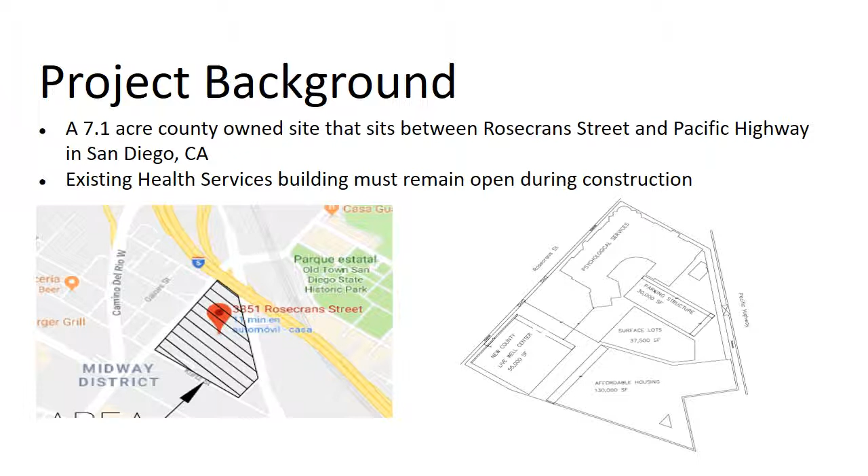In addition to the county's request, a recycling system will be incorporated on site to collect, treat, and reuse both graywater and stormwater runoff to supply the building's irrigation system, green roof toilets, and urinals, as well as achieving LEED Gold status. The project also includes other water, wastewater, and stormwater components, along with geotechnical and construction engineering analysis.

In the existing conditions, the majority of the site's surface is impervious and stormwater flows into the city's stormwater conveyance system without treatment. This degrades the water quality in our oceans, rivers, and bays. So for the proposed site, we plan to capture and treat stormwater prior to its discharge to the city's stormwater conveyance system.

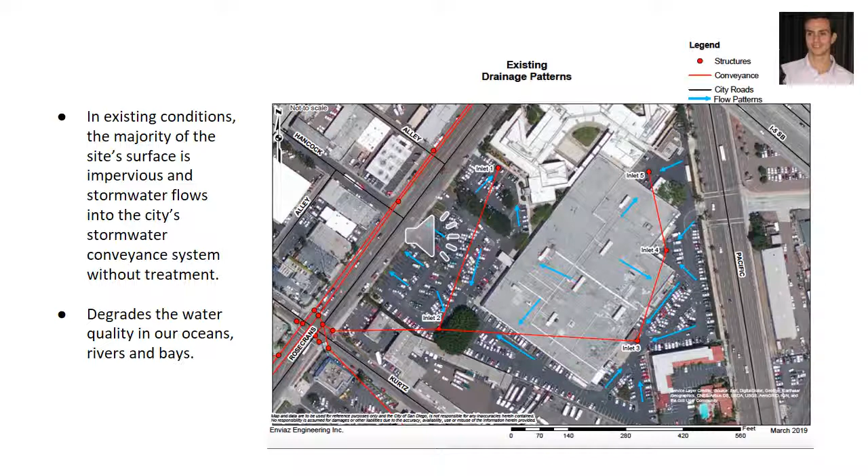The left image is an aerial view of the site on the western side of the existing facility. As the arrows show, stormwater flows directly to Rosecrans Street without prior treatment. The right image shows the weep holes in which stormwater flows. As you will see later in the presentation, our sustainable design includes swales to treat water prior to its discharge.

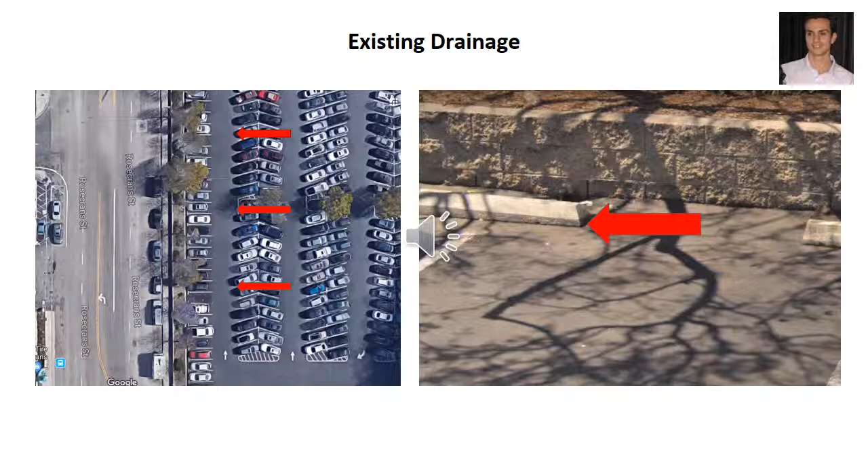Our sustainable site design includes a cistern collection system. After conducting a feasibility study per the City of San Diego stormwater standards, a 3,000-gallon cistern was determined most feasible for irrigation and toilet flushing. A potential savings of up to 42,000 gallons per year is possible during a typical wet year.

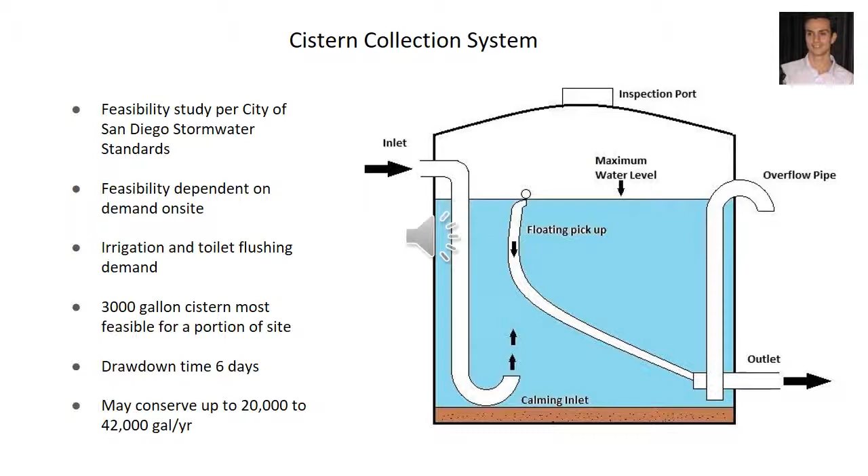Per the County of San Diego's hydrology manual, the rational method was used to determine peak flow values. As you can see on the proposed drainage plan, the site was divided into different basins. This was necessary to determine BMP sizes and to ensure a majority of the water was being captured or treated prior to discharge to the city's conveyance system by diverting stormwater to appropriately sized swales.

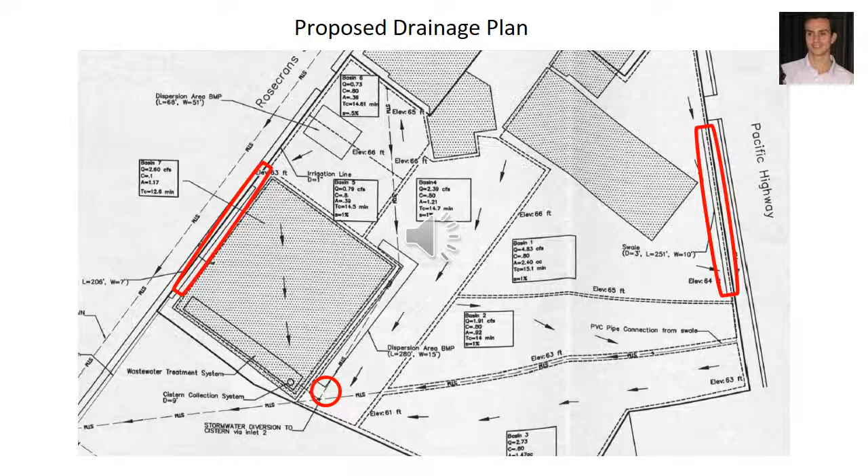The swales are shown on the east and west side of the facility, and the diversion system to the cistern is shown on the red circle.

BMPs use governing principles of low-impact developments, also called LIDs, to conserve natural resources while minimizing and disconnecting impervious area. Site LIDs serve several uses, including retaining a portion of stormwater, providing enhanced infiltration, and increasing hydraulic residence time of water before being discharged into city conveyance systems. They also reduce soil erosion, carbon dioxide emissions, and the heat island effect, all while being visually appealing.

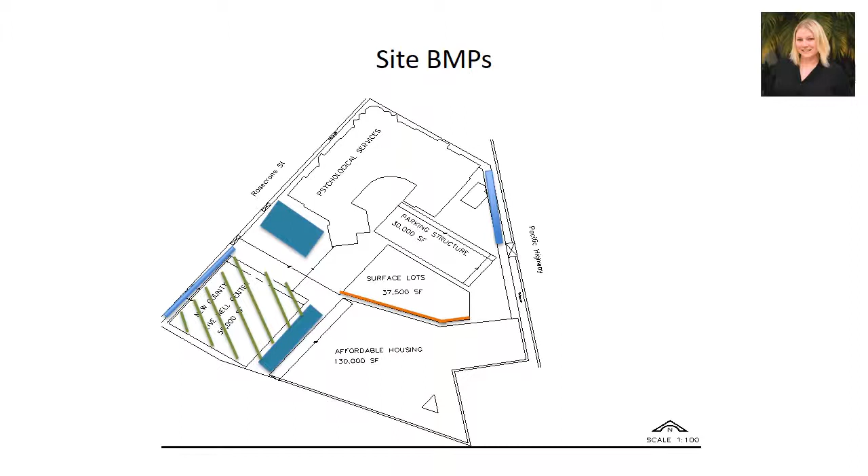BMPs for the site include vegetated swales, impervious dispersion areas, a green roof on the main Livewell Center, and permeable parking and bioretention in the surface lot. Both of the swales and dispersion areas met the drawdown time criteria of 36 hours or less.

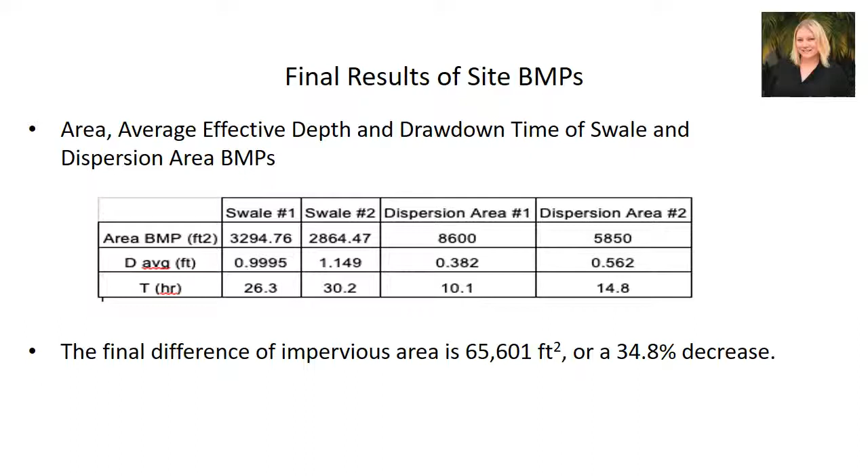The total impervious area of the proposed site design is 122,500 square feet. The use of site LIDs has resulted in an addition of 14,450 square feet of pervious area. This results in a final difference of impervious area of 65,601 square feet, or a 34.8% decrease.

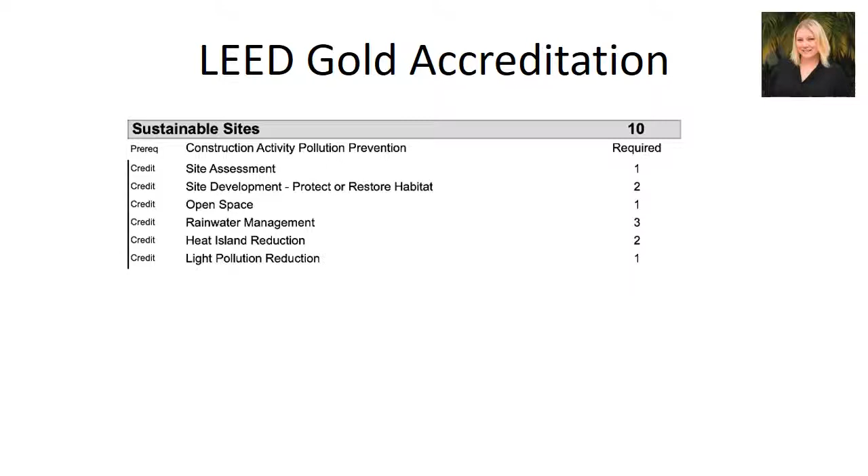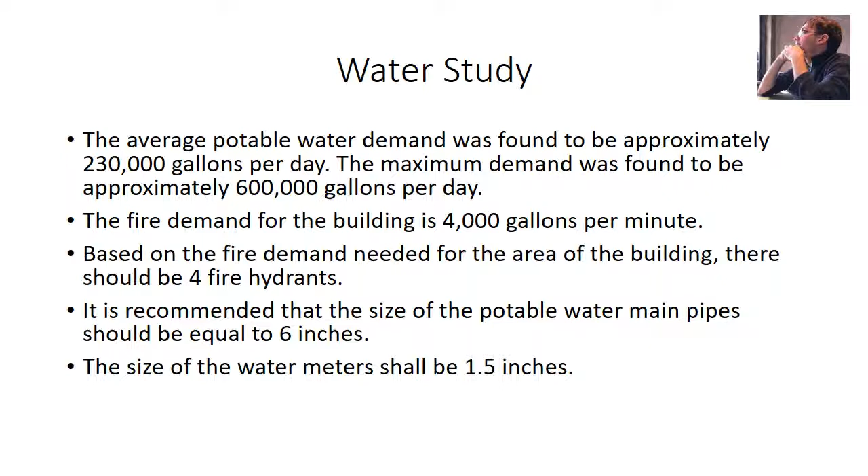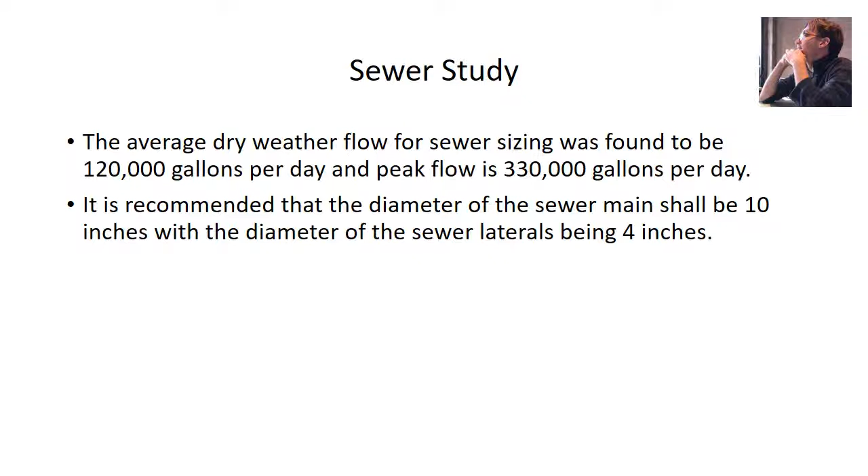It was calculated that the average dry weather flow for sewer sizing would be 120,000 gallons per day, with the peak flow being 330,000 gallons per day. It was also calculated that the diameter of the sewer lateral should be 4 inches, while the diameter of the sewer main should be 10 inches, based on city regulations.

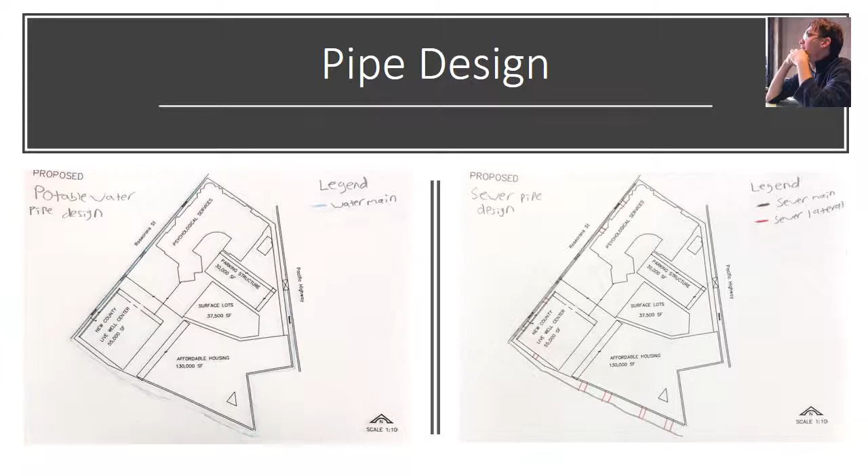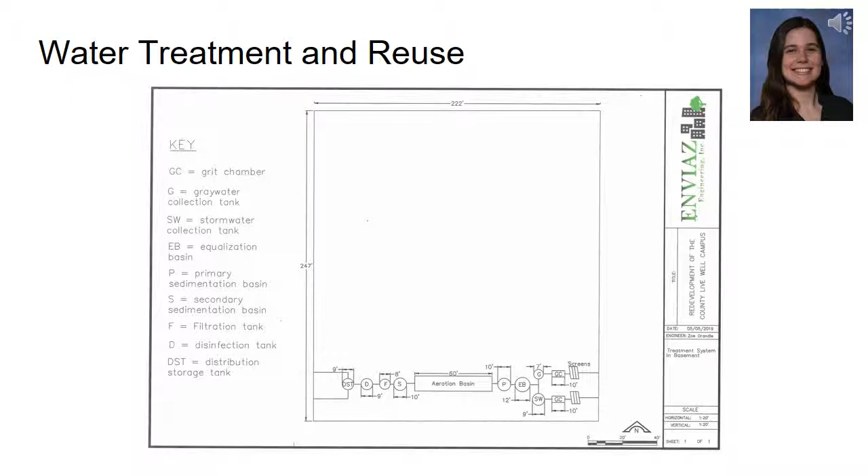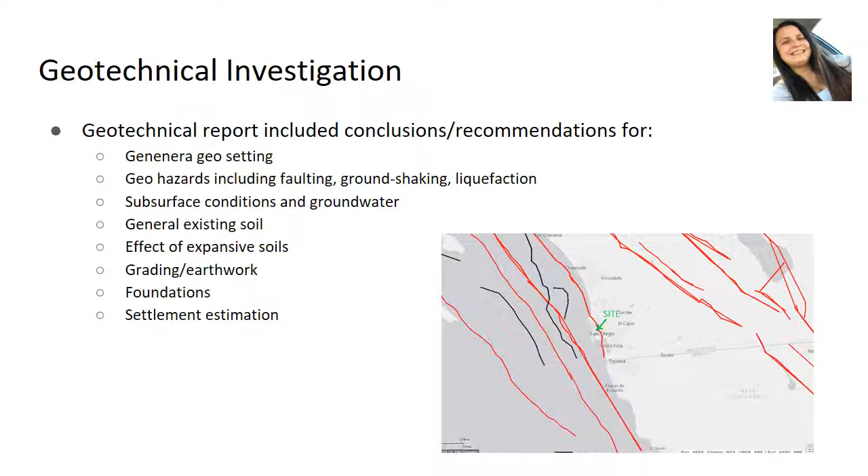The geologic and earthquake engineering part of our report is prepared to respond to the requirements of California Building Code, Chapter 18. The investigation was based on exploratory boring testing conducted by Woodward Clyde Consultants prior to the construction of the Health and Human Services Center currently present on the site.

Some of the findings included that the upper 10 to 12 feet of soil at the site consists of fill, which is mostly made up of silt and clay sands with occasional gravel pockets. Groundwater was also encountered in all the test points at a depth of about 10 feet.

It is our opinion that each of the 8 faults discussed in the report can produce an earthquake resulting in significant ground motion at the site. The loose to medium dense sands and non-cohesive silts of the bay deposits generally are considered susceptible to liquefaction due to intense ground shaking. It is also our opinion that if cohesive soils such as clays or plastic silts are placed under the foundation during construction, then the potential for liquefaction will be greatly reduced.

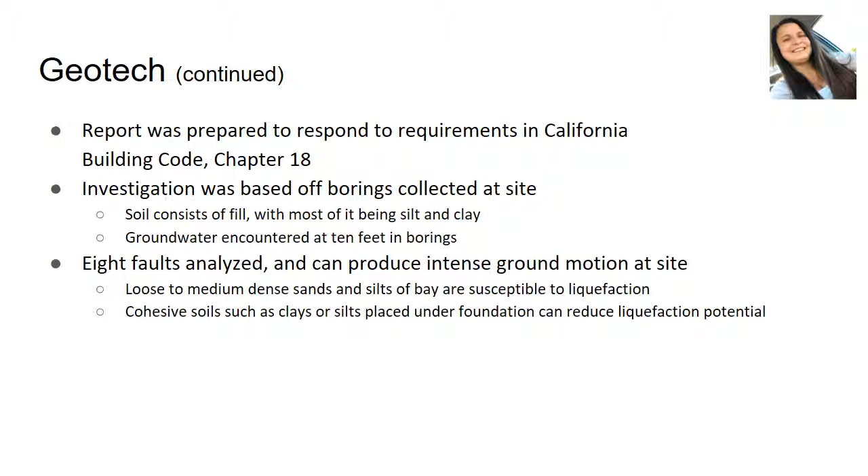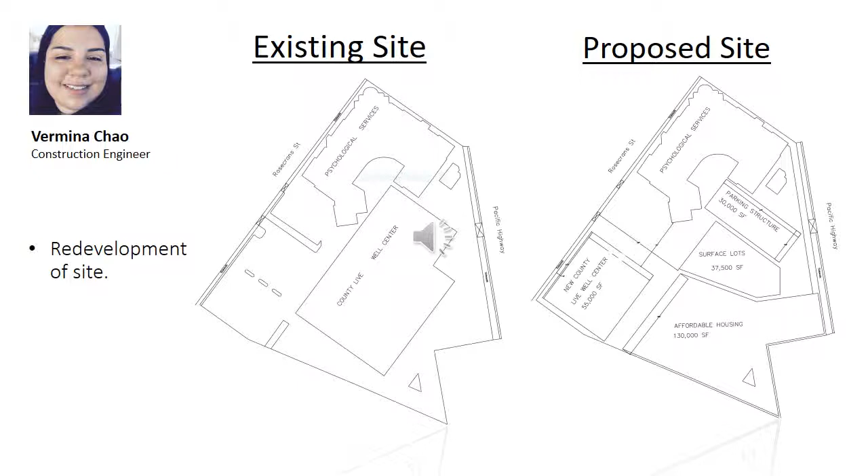The proposed construction plan details the redevelopment of the County Live Well campus, which includes a 55,000 square foot 4-story Livewell Center building, a 30,000 square foot 4-story parking structure, a 37,500 square foot area available for surface lots, and 3 acres of land for future affordable housing. The existing psychological services is not included in our scope.

In order to overcome the site constraint of ensuring the existing health services and psychological services remain operational during construction, the construction must be separated into 2 phases. Phase 1 consists of closing the north part of the site as shown, in order to build the new Livewell Center building. Once that is finished, the patients and employees from the existing building will be moved. Phase 2 begins by closing the south side of the site and demolishing the existing building in order to commence construction.

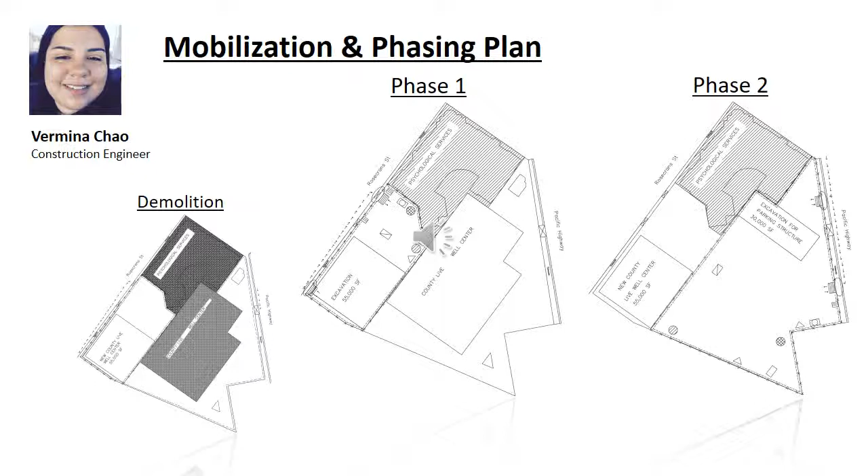Each phase will take approximately 1.5 years, with an overall project duration of 3 years. The schedule created outlines major construction tasks in sequence.

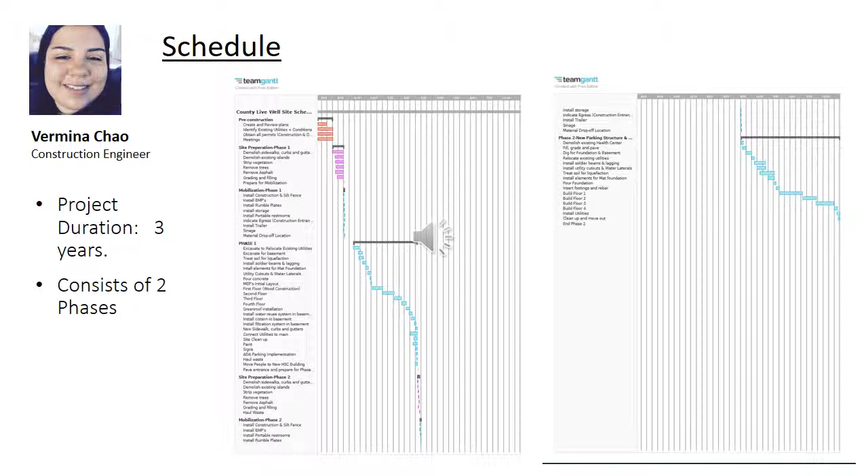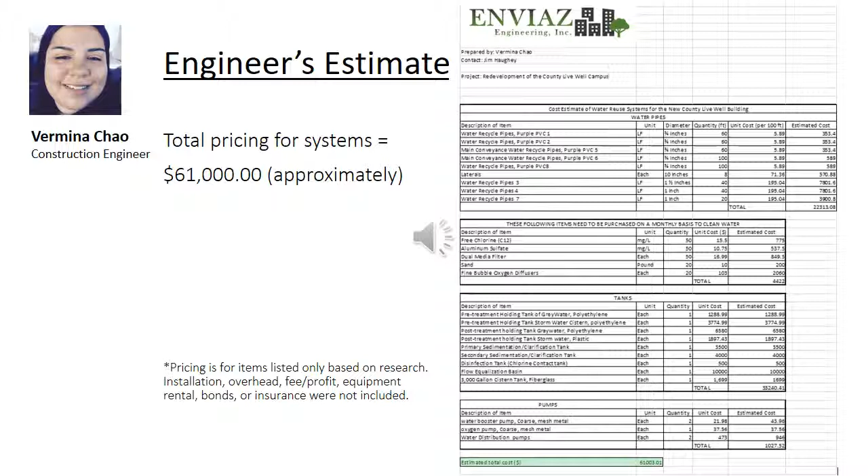The engineer's estimate consists of unit pricing for the systems needed by my team, which includes a 5,000-gallon cistern made of fiberglass to collect stormwater, tanks, and booster pumps, to name a few. The approximate cost is $61,000.

In conclusion, the Live Well campus can be feasibly constructed despite the site constraints.